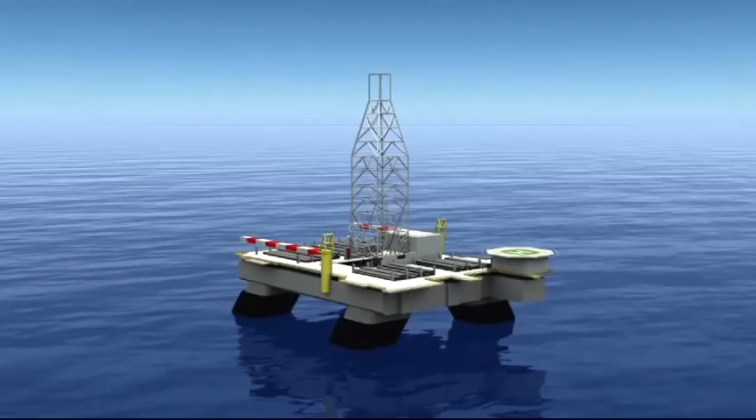This video summarizes the findings and analysis of this investigation team. As I review these, it's important to keep in mind the goals of the investigation. Our team was assembled immediately after April 20th in order to identify the critical factors underlying the accident.

Our mandate was to determine what happened so that BP could take whatever steps necessary to prevent a similar accident from ever happening again. Our purpose was not to apportion blame or liability, but rather to learn, recommend areas for improvement, and share our lessons with others.

While I believe we had sufficient evidence to reach the findings summarized here, our work was limited by a lack of direct access to some witnesses and to certain physical evidence. I will be presenting our findings factually, but it is important to note that our purpose was not to create a record that would serve as the definitive or final word on what happened.

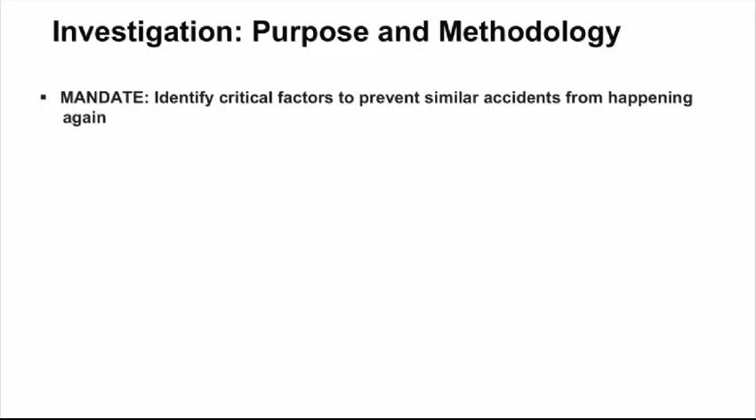The investigation team consisted of more than 50 internal and external engineering specialists with expertise in various aspects of deepwater drilling and exploration. We worked over a 4-month period examining all available evidence.

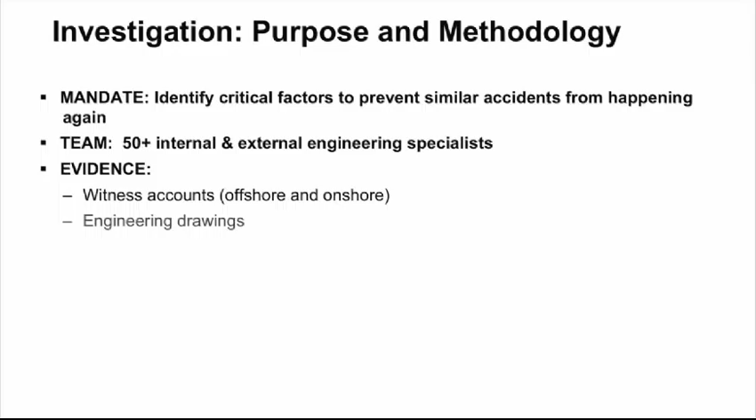This visual portrayal of our key findings is best viewed in the context of the report, which describes more fully the basis for findings. The findings were based on witness accounts, analysis and modeling, as well as engineering drawings, real-time data from the Deepwater Horizon, physical evidence, and testimony gathered from governmental inquiries.

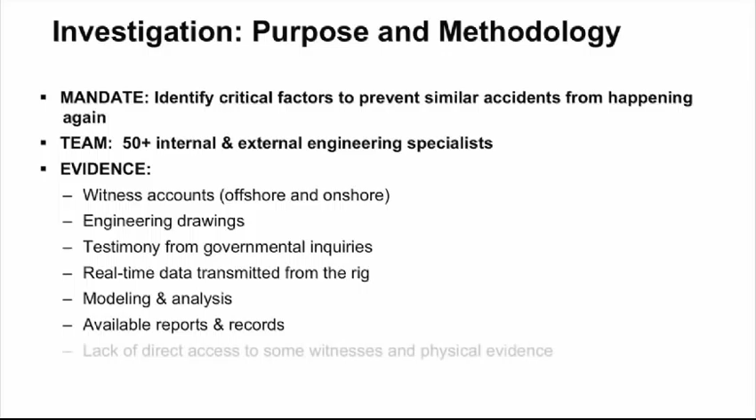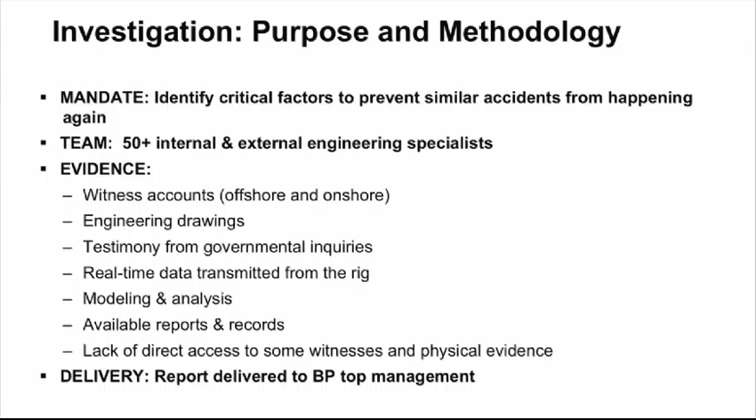The team's report was delivered to the board and BP's top management. They are sharing it publicly in order to keep the public informed, to assist with the government's various investigations, and to ensure that BP and the industry can learn from the accident and take appropriate actions going forward.

To determine what led to the tragedy, it's important to first understand the events that occurred aboard the Deepwater Horizon leading up to the accident. This short animation depicts the best understanding the team was able to reach about the chronology of key events as we understand them today. This is an animated reconstruction of the tragic accident aboard the Deepwater Horizon on April 20th, 2010. This narrative has been developed to illustrate what we determined were the key events related to the accident. The animation contained in this narrative is representative and for illustrative purposes only, and has not been drawn to scale.

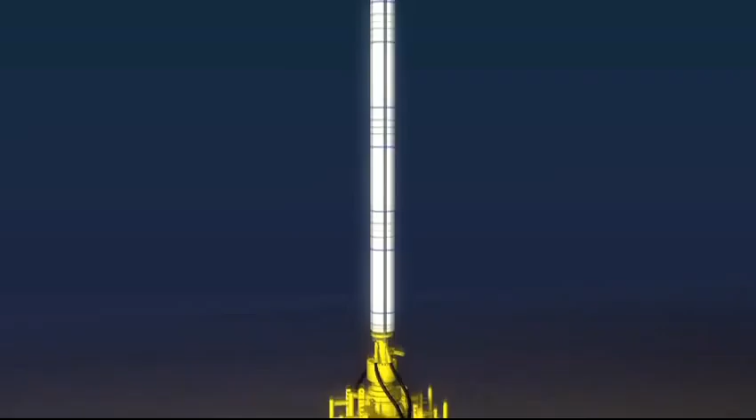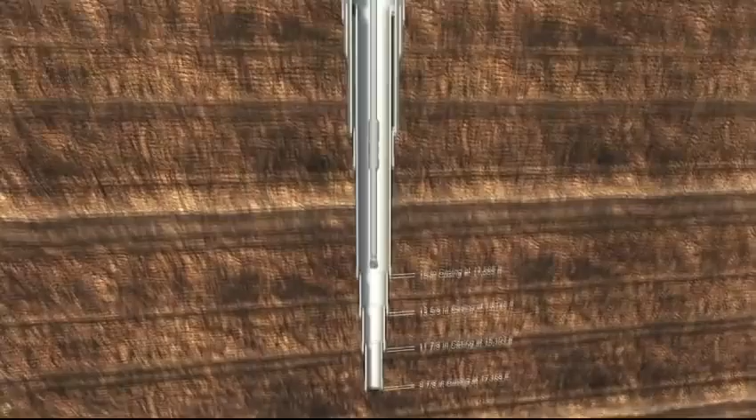The Deepwater Horizon was a dynamically positioned drilling vessel whose construction was finished in 2001. It was designed to drill in water depths up to 10,000 feet. The vessel arrived on the Macondo location on January 31st, 2010, to finish the exploratory well that had been started earlier by its sister vessel.

The riser and the BOP were installed successfully. 4 casing strings were installed over a 2.5-month period. Our narrative begins on April 9th, 2010. The final hole section of the well was drilled to a total depth of 18,360 feet. The long string production casing was installed.

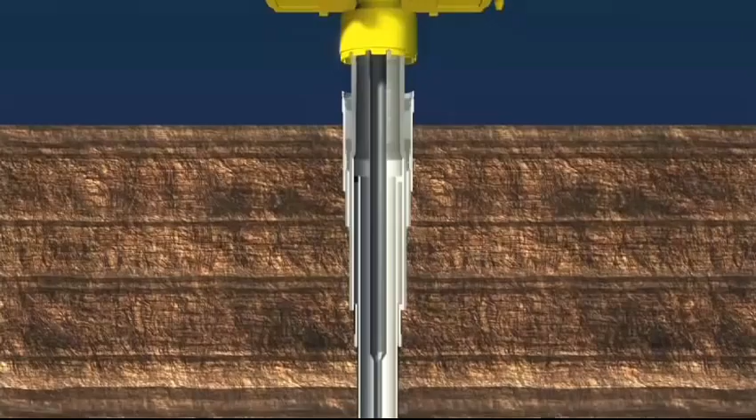During the afternoon of April 19th, the cement job started. Cement is used as a barrier to seal the wellbore from the reservoir sand. Nitrified foam cement was pumped into the annulus and non-foam cement was pumped into the shoe track. At this point, the pump pressure was bled off and it appeared that the check valves in the float collar were holding. It's now the morning of April 20th.

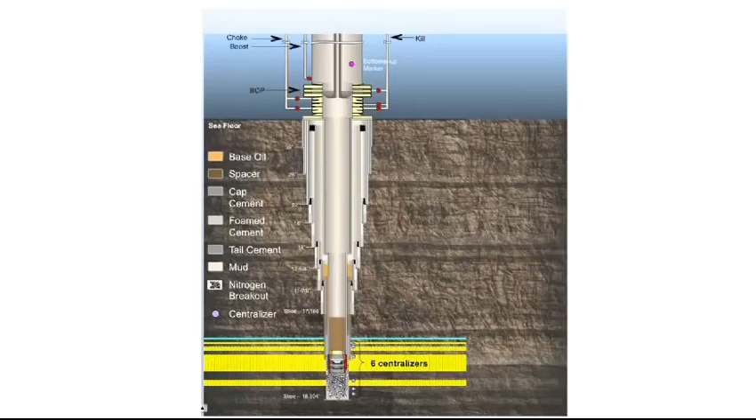The wellhead seal assembly was installed and tested. A positive pressure test, which is the first integrity test of the well, was conducted by closing the blind shear rams and applying 2,700 psi of pressure. The test confirmed integrity of the blind shear rams, the seal assembly, casing, and top wiper plug. The shoe track, which also plays a key role in isolating hydrocarbons, is not tested because of the presence of the top wiper plug. It's now early afternoon.

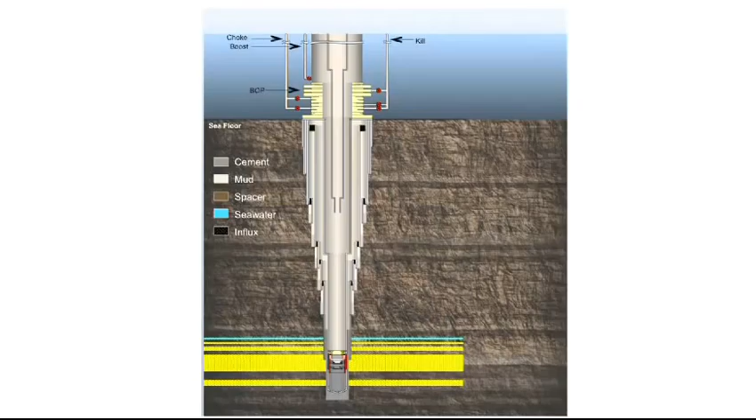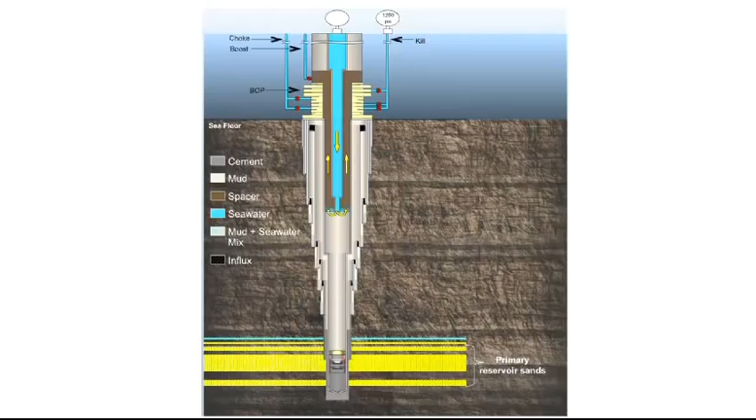The drill pipe was run to 8,367 feet in preparation for the negative test, which was the second test of the well's integrity. The test's purpose was to place the well in a controlled, underbalanced state to test all mechanical barriers. It was conducted by displacing some of the mud in the well with a spacer followed by seawater.

After displacement, the upper annular preventer was closed. An attempt to bleed the system down to 0 psi was made, but fluid in the riser was leaking past the annular preventer.

It's now 1708. The hydraulic closing pressure for the annular preventer was increased to 1900 psi in order to create a tighter seal against the drill pipe. The riser was filled with an estimated 50 barrels of mud to replace the volume that had leaked past the annular. At 1727, the drill pipe valve was opened and the pressure reduced to 0 by bleeding off 15 to 23 barrels of seawater.

It's now 1735. The well site leader advised the rig crew that the negative test procedure needed to be conducted on the kill line to meet permit requirements. The drill pipe valve was closed and the testing reconfigured for flow to be monitored on the kill line. At 1752, the kill line valve was opened. Based on eyewitness accounts, somewhere between 3 and 15 barrels of seawater were bled off. The kill line valve was closed and the drill pipe pressure gradually increased.

It's now 1842. Seawater was pumped into the kill line to confirm that it was full. The kill line was routed to the mini trip tank, and less than 1 barrel was bled from the kill line. The flow stopped. The kill line was monitored for 30 minutes and showed no flow, but the drill pipe pressure remained at 1400 psi. A discussion about the source of the 1400 psi took place. It was explained as a phenomenon called the bladder effect. The test was deemed successful.

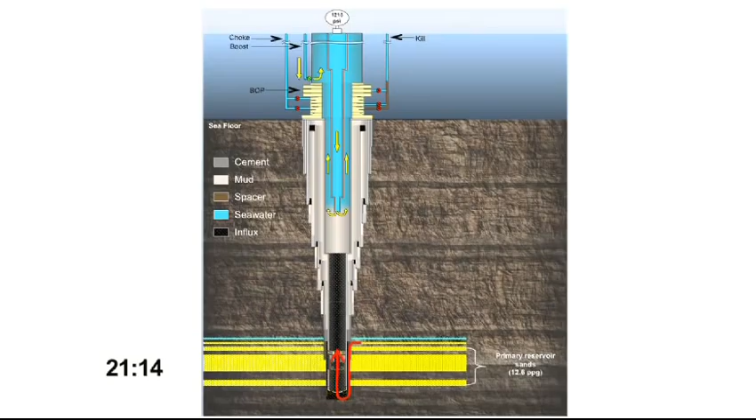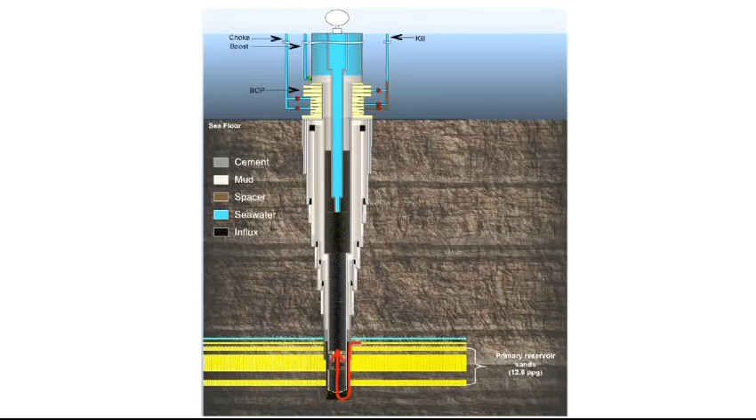Displacement of the mud with seawater resumed at 2114. It's now 2131. All mud pumps were shut down. An estimated 300-barrel gain has been taken. Over the next 5 minutes, the drill pipe pressure increased by 556 psi. Rig personnel discussed the differential pressure on the drill pipe. In the next 2 minutes, it appears an attempt was made to bleed the drill pipe, possibly to investigate the differential pressure. Over the next 20 minutes, a series of critical well control events occurred, ending in the order to abandon ship.

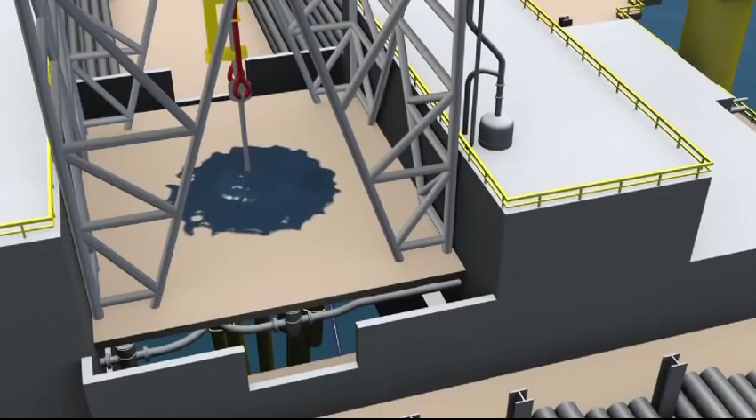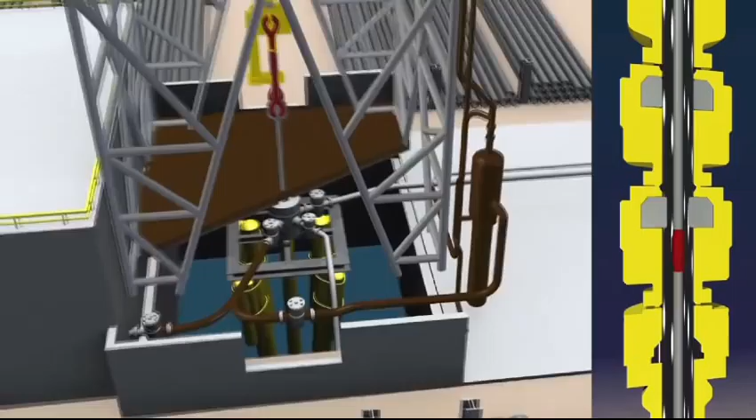It's now 2140. Mud overflowed onto the rig floor. A minute later, the mud shot up through the derrick. The diverter was closed and flow was diverted to the mud gas separator. At about the same time, the rig crew appeared to close an annular preventer and drill pipe pressure increased steadily from 338 psi to 1200 psi over a 5-minute period. Mud and hydrocarbons discharged onto the rig and overboard.

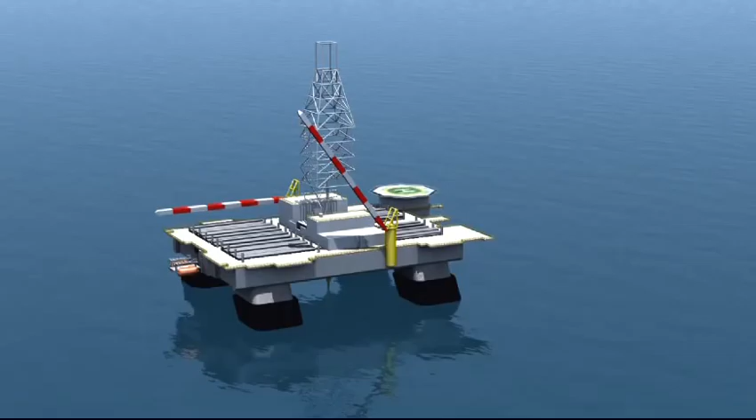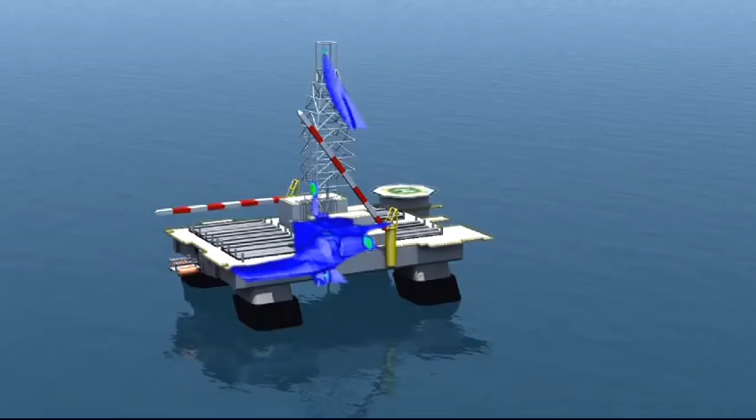Activation of the annular preventer appears to have failed to seal the annulus. It's now 2147. The first gas alarm sounded. A cloud of gas spread, setting off other gas alarms. There was a roaring noise and the vessel vibrated. The drill pipe pressure rapidly increased to 5,730 psi, which is thought to be the result of the BOP sealing around the drill pipe, likely after activation of the variable bore rams or the annular preventer fully sealing.

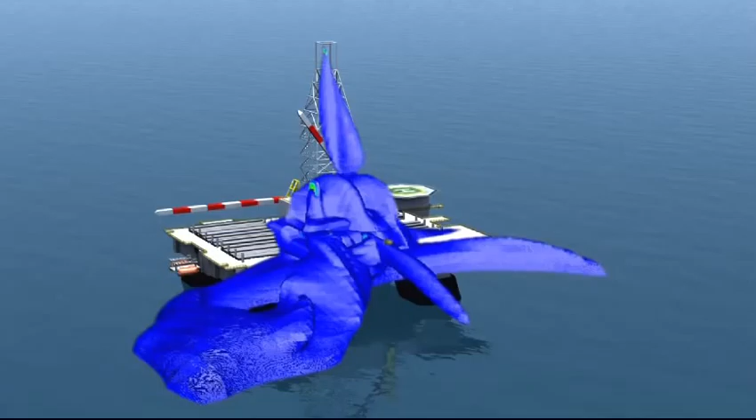1 minute later, the combustible gas cloud reached the aft starboard quadrant of the main deck and probably entered the air intakes for the engine room. Gas also dispersed under the deck and into the engine room enclosures. The main power generation engines went into overspeed. Within another minute, electrical power was lost and there were 2 explosions. The first occurred at about the same time as the power loss. The second occurred an estimated 10 seconds later. The second explosion appears to have taken place under the main deck in the aft starboard quadrant of the rig.

The associated blast pressure wave traveled forward and caused extensive damage to the starboard side, potentially damaging the MUX cables, which allow the vessel to communicate with the BOP. The hydraulic line which powers the BOP may also have been damaged.

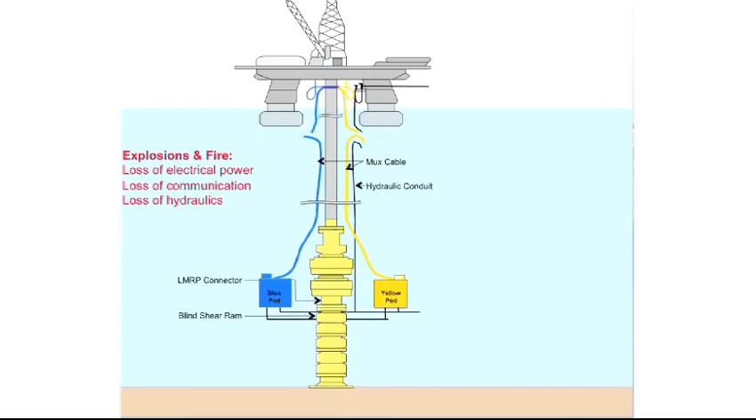The fire and explosions may also have caused damage to the surface drill pipe equipment, resulting in hydrocarbons flowing to the surface through the drill pipe. The valve on the drill pipe was left open, exposing surface components to high shut-in pressure.

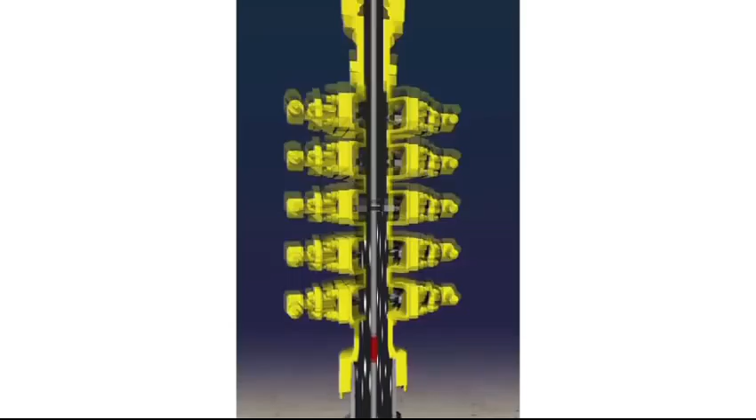While the BOP had closed around the drill pipe, it did not seal the well, and the subsequent loss of power may have resulted in the rig drifting off station. The drifting rig may have broken the BOP seal around the drill pipe and allowed hydrocarbons to continue to flow up the riser. One or a combination of these events ultimately allowed the fire to be continually fed.

It's now 21:52. Over the next 5 minutes, personnel attempted to shut in the well and disconnect the lower marine riser package from the BOP stack. The emergency disconnect sequence for the BOP was activated from the bridge.

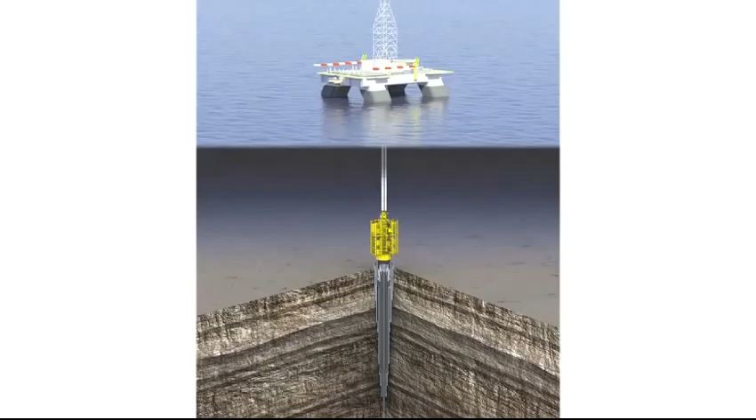While lights changed on the control panel, no flow was observed on the flow meters. It appears that the emergency disconnect system did not function. The lower marine riser package failed to unlatch from the BOP, and the BOP did not seal the well. With the Deepwater Horizon unable to disconnect from the well, the order to abandon ship was given at 2200 hours.

This animated chronology has shown what we believe happened. Now we'll turn to an analysis identifying the contributing factors. As you'll see, we concluded that there was no single action or inaction that caused the accident. Instead, we found that there were 8 interrelated and contributing factors that led to this tragedy.

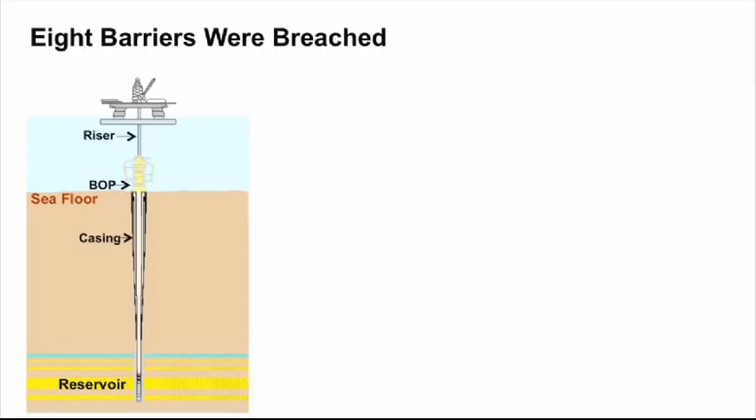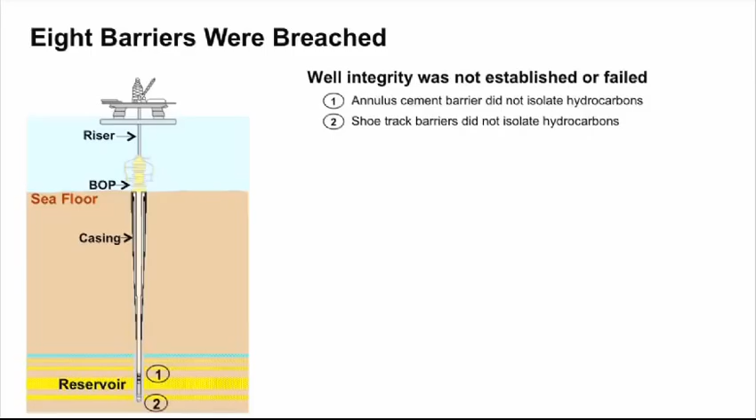The first 2 findings of the investigation relate to hydrocarbons entering the well. We believe that the evidence shows that both the annulus cement barrier and the shoe track barriers did not isolate the hydrocarbons, allowing them to flow up the wellbore.

The next 3 findings stem from evidence that the rig crew did not observe or recognize that hydrocarbons had entered the well before appropriate steps could be taken to contain them. The negative pressure test conducted in order to confirm well integrity was incorrectly accepted.

An influx of hydrocarbons was not recognized until it was too late to prevent the hydrocarbons from reaching the surface because they had already entered the riser. And well control response actions failed to seal and regain control of the well.

Our 6th and 7th findings relate to evidence that hydrocarbons came up through the riser and were dispersed across the vessel, creating the conditions for them to ignite.

We found that the well flow was diverted to the rig's mud gas separator, causing gas to be vented onto the vessel rather than being diverted overboard. Then, the vessel's fire and gas system did not prevent hydrocarbon ignition.

Our 8th and final finding was drawn from evidence relating to the blowout preventer. With the loss of well control and subsequent explosions and fires, the BOP did not seal the well. Each of these findings is explained in greater detail throughout the remainder of this presentation.

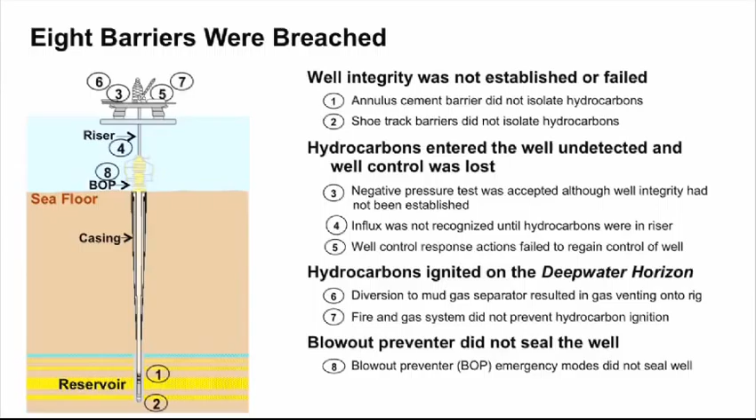Our first key finding relates to the cement job. BP relied on the expertise of Halliburton, the cementing services provider, to recommend a cement slurry appropriate for this well. The BP team was responsible for assuring Halliburton's work and accepting its proposal.

It was clear from the event that the cement did not isolate the hydrocarbons. The challenge facing the investigation team was to determine what happened without access to actual samples of the cement slurry used in the Macondo well. Therefore, we had an independent laboratory analyze the slurry design and also create and test samples based on that design.

Through our investigation of the cement job, we noted the following critical items. First, the high percentage of nitrogen in the foam cement made it difficult to create a stable foam slurry. Second, there were no fluid loss additives used in the entire cement slurry. Third, a relatively small amount of cement was pumped in relation to the displacement volume, increasing the likelihood of cement contamination. And fourth, Halliburton did not conduct comprehensive lab tests that could have identified potential problems with the cement.

The independent laboratory constructed representative cement samples based on the slurry design and demonstrated that cement stability could not be achieved. Therefore, we've concluded that the foam slurry likely experienced nitrogen breakout, resulting in nitrogen migration, slurry contamination, and incorrect cement density. Our investigation of the cement job also included an analysis of BP's decision to use 6 centralizers and a long string production casing in the well.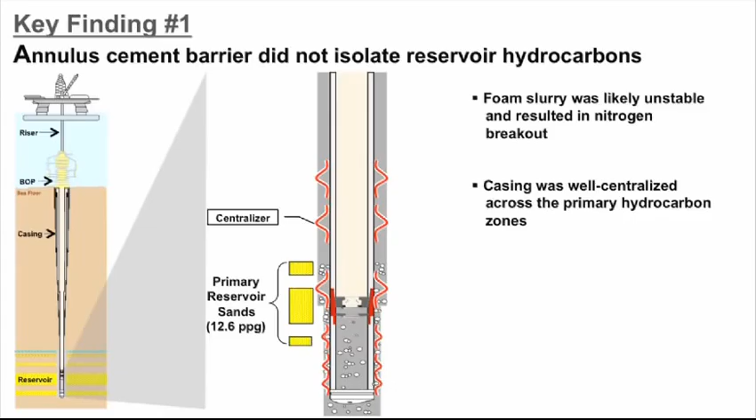The investigation team's next task was to determine the actual point of entry for hydrocarbons into the well. We examined and analyzed every plausible entry point. As a result, our second key finding is that the initial hydrocarbon entry occurred at the shoe track and that its mechanical barriers therefore did not isolate the hydrocarbons. Our conclusion is based in part on hydrostatic pressure calculations, well flow modeling, and an analysis of data recorded during the successful static kill of the Macondo well.

The shoe track has 2 types of mechanical barriers: the cement in the shoe track and the double check valves in the float collar. The investigation team believes that the shoe track cement failed to act as a barrier. The team has not established whether this failure was attributable to the design of the cement, contamination of the cement by mud in the wellbore, commingling of the cement with nitrogen due to nitrogen breakout from the foam cement, swapping of the shoe track cement with the mud in the bottom of the well, or some combination of these factors.

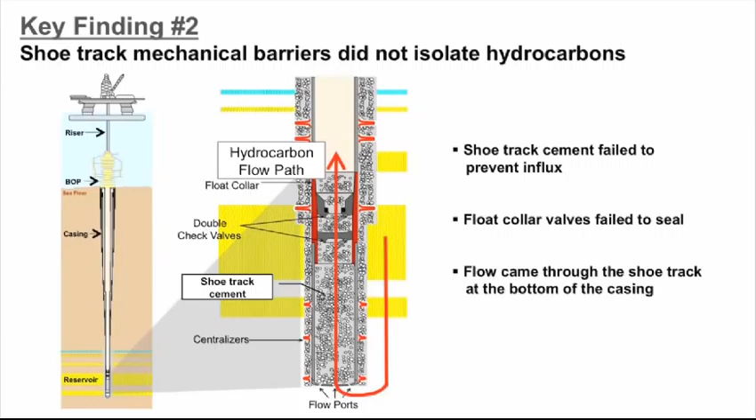Hydrocarbons were able to bypass the float collar check valves because they were damaged, they never properly converted, or they simply failed to seal. The evidence shows that the flow came up through the shoe track at the bottom of the production casing. Therefore, the decision to use 6 centralizers likely did not contribute to the outcome.

The third key finding is that the negative pressure test was accepted, even though well integrity had not been established. The negative test was conducted to confirm the integrity of the annulus cement, shoe track, casing, and wellhead seal assembly.

Looking back, the investigation team believes there were several issues associated with this negative test. First, at the start of the test, the annular preventer allowed approximately 50 barrels of spacer to pass into the BOP. This may have inhibited the pressure readings on the kill line. Second, the bleed-off volumes we examined were in excess of what should have been expected, indicating communication with the reservoir through failed barriers.

And third, rig personnel found that drill pipe pressure had increased to 1,400 psi with no flow on the kill line. The investigation team believes this reading should have resulted in further inquiry into the well's integrity. Instead, the abnormal pressure was attributed to a phenomenon called the bladder effect.

Ultimately, the negative test was incorrectly deemed a success by BP and Transocean rig personnel. A more detailed procedure would have helped BP and Transocean personnel to implement and interpret the negative test.

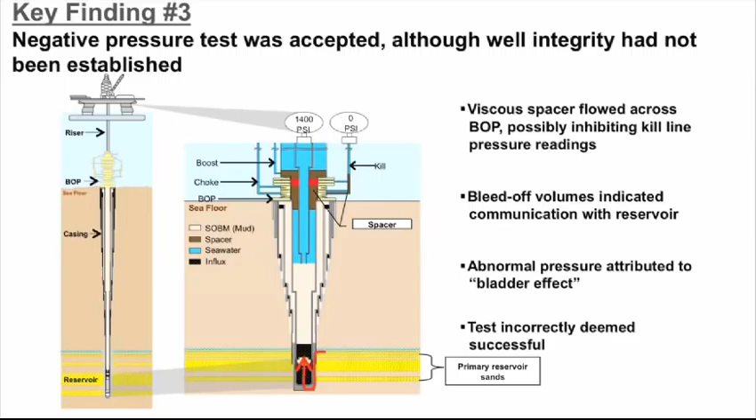The investigation's fourth key finding is that the influx of hydrocarbons into the well was not recognized until it had entered the riser. Well control principles rely on early influx detection and effective response. The investigation team examined real-time data from the rig, conducted dynamic flow modeling, and reviewed witness accounts in order to reconstruct the key indications of flow that we believe were not observed or recognized.

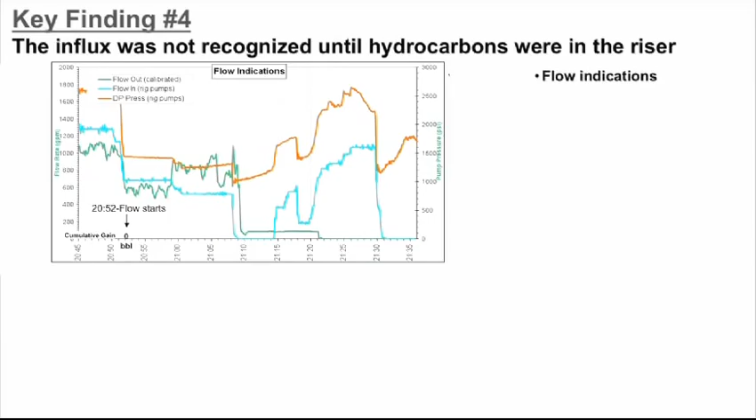It appears that there were a number of indicators of hydrocarbon influx that went unobserved or unrecognized. First, from 2058 to 2108, the drill pipe pressure should have decreased. Instead, drill pipe pressure increased by 100 psi at a constant pump rate starting at 2101. By 2108, a 39-barrel gain had been taken.

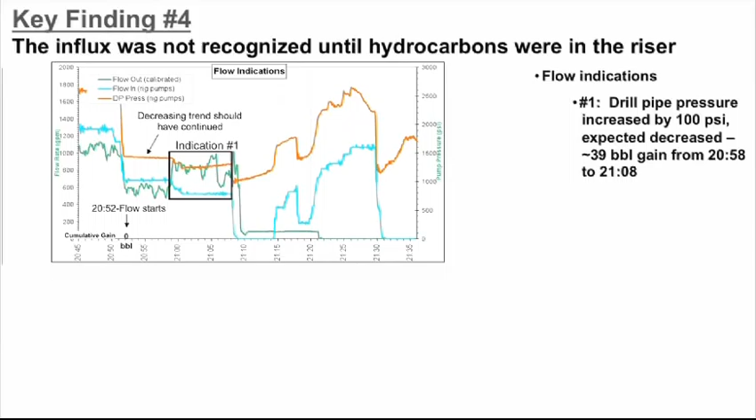Second, from 2108 to 2114, the drill pipe pressure increased by 246 psi with the pumps off. Pressure should not have changed during this period. And third, by 2131, an estimated 300-barrel gain had been taken. Over the next 5 minutes, the drill pipe pressure increased by 556 psi, again with the pumps off.

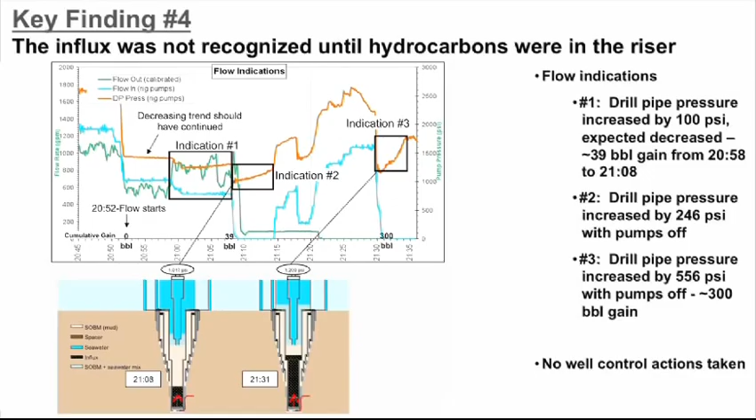These indicators should have been observable, but it appears the first well control actions were not taken until about 2141, by which time an estimated 1,000-barrel gain had been taken. The investigation team has not reached a conclusion as to why these indicators were not observed or recognized. We note, however, that simultaneous operations were occurring on board the vessel at this time, including mud pit cleaning and mud pit transfers, which may have masked the indications of a hydrocarbon influx.

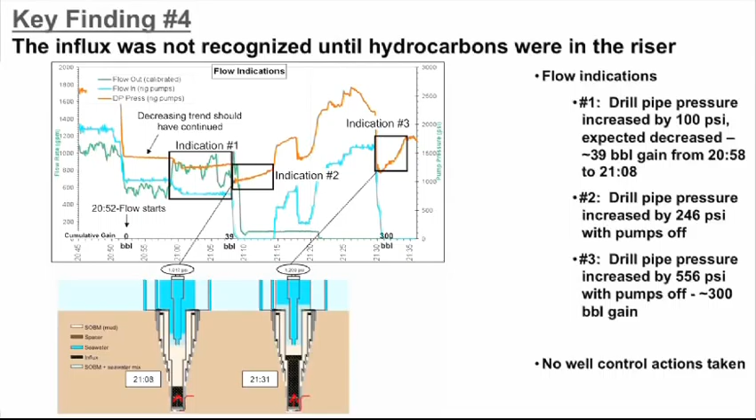The fifth key finding is that well control response actions did not regain control of the well. Upon recognizing an influx, the well must be shut in, and if necessary, hydrocarbons diverted safely away from the vessel.

The investigation team believes that the response on April 20th was not typical of a rig crew that was aware a significant well control event was occurring. For example, in retrospect, there was about a 40-minute gap between the first indication of hydrocarbon influx and the first well control response. Roughly 8 minutes later, the first explosion occurred. When action was taken, the diverter was closed and the flow was routed to the mud gas separator.

Also, at that point in time, it appears that an annular preventer was activated, but apparently did not immediately seal. The BOP sealed about 6 minutes later. The investigation team believes that the time for effective emergency response was significantly shortened because initial indications that hydrocarbon had entered the well went unobserved or unrecognized.

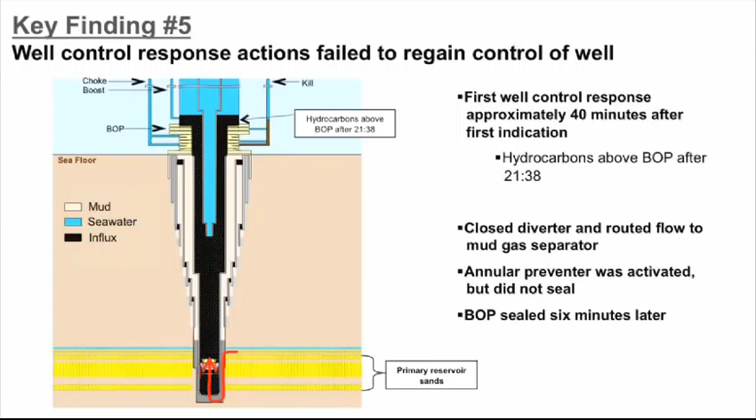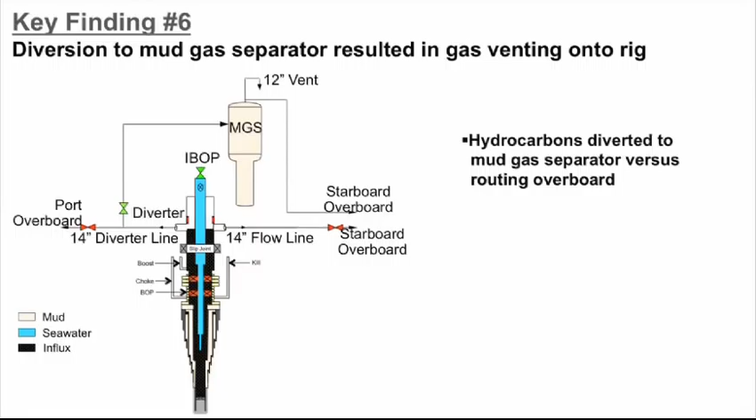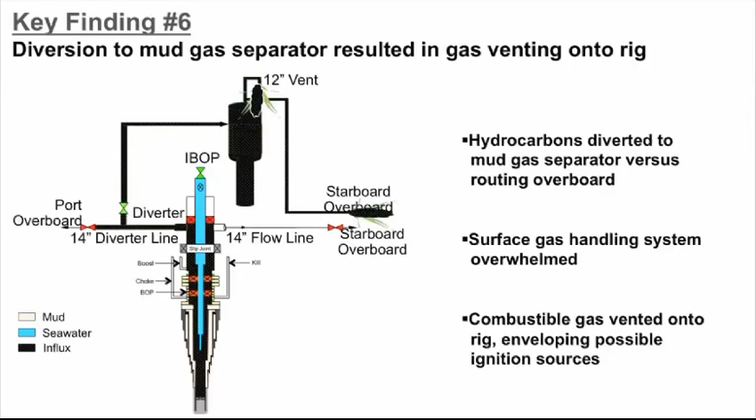The mud gas separator is designed to remove small amounts of entrained gas, but not the significant volumes experienced here. Large volumes would generally be expected to be sent overboard via the 14-inch diverter line. As gas dispersed across the vessel, potential ignition sources were enveloped in a flammable vapor cloud.

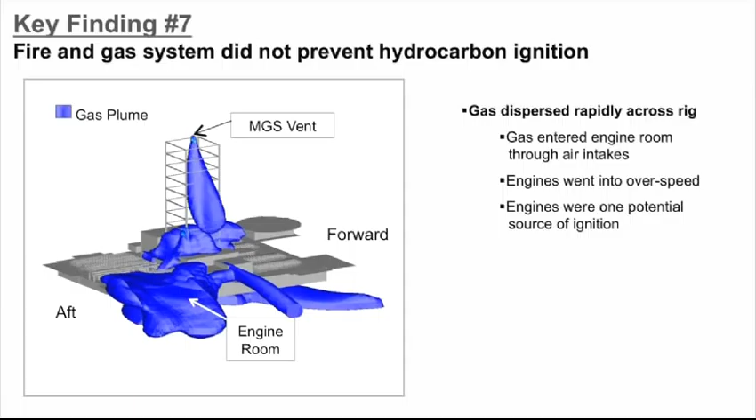The seventh key finding is that the fire and gas system on the Deepwater Horizon did not prevent hydrocarbon ignition. Gas dispersion modeling conducted by the investigation team shows that rapid spread of gas across the vessel covered the main deck and moon pool areas, overwhelming the secondary protective devices. The investigation team believes that the gas likely entered the engine rooms through the main deck air intakes, resulting in engines going into overspeed. These engines were one potential source of ignition.

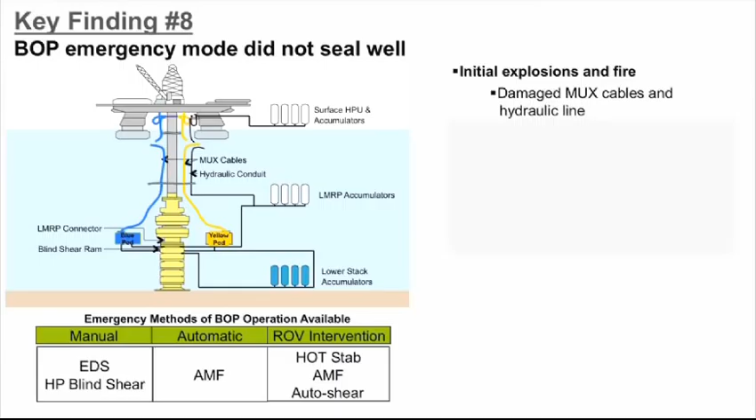The eighth and final key finding is that the blowout preventer did not seal the well. The investigation focused on the BOP's emergency systems and why they failed to seal the well after the initial explosion. The investigation team identified issues that we believe interfered with the operation of the BOP. First, the initial explosions and fire damaged the control cables, called MUX cables, and the hydraulic lines.

The MUX cables are critical to BOP operation because they provide electronic communication and electrical power to the BOP control pods. This is likely why the emergency disconnect system failed to activate the blind shear ram when it was triggered by personnel on the bridge of the Deepwater Horizon.

Second, we believe, based on testing done at the direction of Transocean, after both control pods had been retrieved, that the automatic mode function, or AMF sequence, did not complete. The AMF should have activated automatically, without crew intervention, when the MUX cables and hydraulic line were damaged. At least one operational control pod was required to activate the AMF. However, based on testing, there was a defective solenoid valve in one control pod and insufficient charge on the batteries in the other control pod.

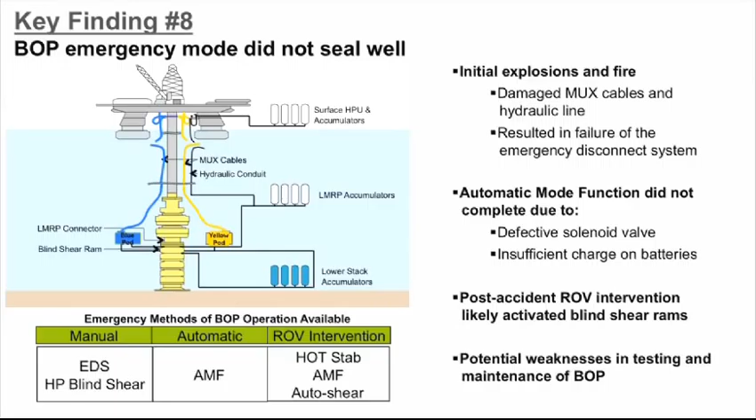We believe that the ROV intervention to simulate auto-shear conditions likely activated the blind shear rams, but they failed to seal the well and hydrocarbons continued to flow. The investigation team has not determined the reasons for the failure of the blind shear rams to seal.

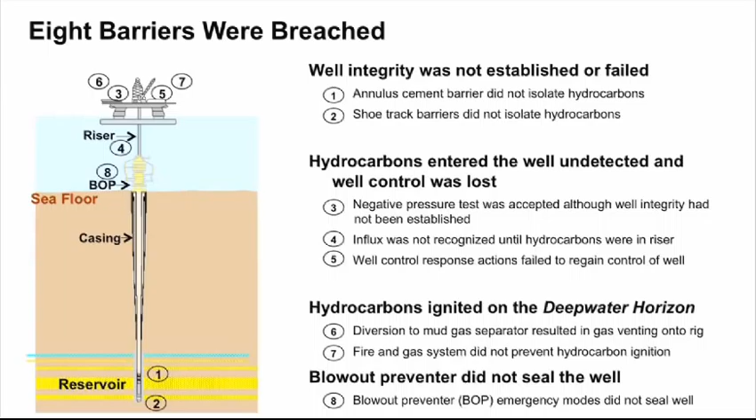Presence of non-shearable pipe across the blind shear ram, insufficient hydraulic power subsea, and prevailing flow conditions are among the potential causes of failure. The investigation team also found indications of potential weaknesses in the testing regime and maintenance management system for the BOP. The BOP is a complex device, and more may be known when it is fully examined.

In summary, as I noted at the outset, the investigation team concluded that there was no single action or inaction that caused the Deepwater Horizon accident. 8 safety barriers were breached. The accident was the culmination of a complex and interlinked series of mechanical failures, human judgments, engineering design, operational implementation, and team communication. These involved a number of companies, including BP.

This presentation of the report's findings is intended as a high-level overview. The full report is available on BP's website. BP's senior management has accepted all of the team's recommendations, which address changes that should be made in drilling and well operations, as well as contractor and service provider oversight.

Finally, in the course of conducting the investigation, the team learned of many brave acts by people on the night of the accident. I would like to close by recognizing those individuals for the lives they undoubtedly saved and by extending our sympathies to the families of the 11 men who died that night and to the communities subsequently affected by the spill.